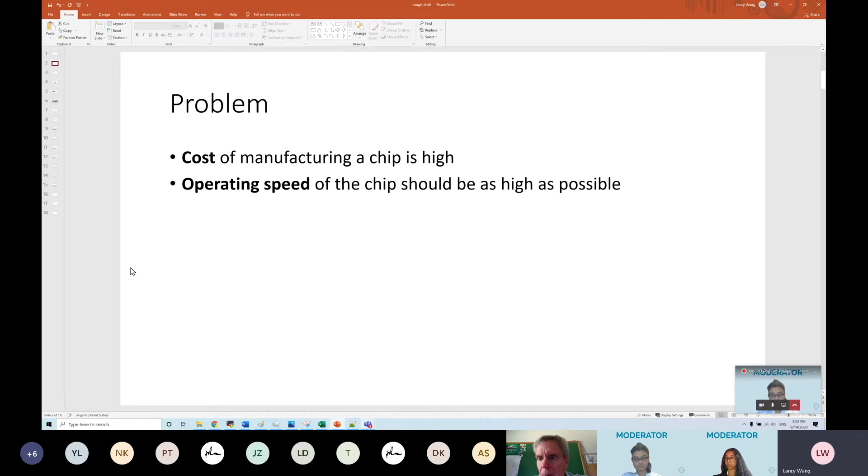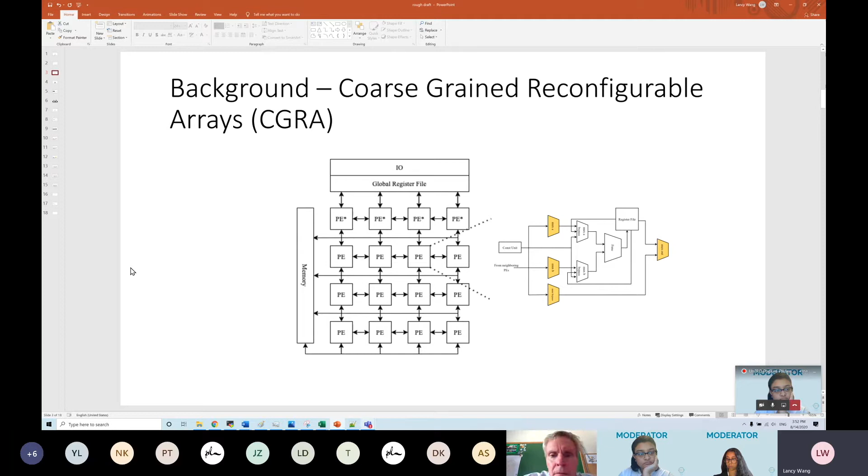The CGRA works by allowing the PEs in this diagram to talk to each other using interconnects, represented by the orange blobs on the right. And the goal of our research is to reduce the area cost of these interconnects. In a 2017 IEEE paper written by Stephen Chin, the interconnects in a CGRA can be shown to occupy over 20% of the overall chip area, making our attempts a meaningful effort at cost reduction.

So let me explain our goal using an analogy. Imagine a highway used to connect parts of a city. People get on the highway so they can reach their destination, where they can then work, eat, or do whatever else they need to carry about their day. Note that people don't actually want to spend that much time on a highway, and cities don't want to be congested by them. Now, the interconnects of a CGRA are like a highway.

Instead of transporting people, they transport signals so they can eventually reach their destination to do a computation. Like a highway, the interconnects don't actually allow signals to do useful work. However, they still take up space in the chip, and space is money. Now, you might be asking, since they're not doing any work, why not get rid of them? Well, it turns out that we can't, just like we can't yet with a highway. What we can do, however, is reduce their area cost as much as we can, and we do this through a method called double pumping.

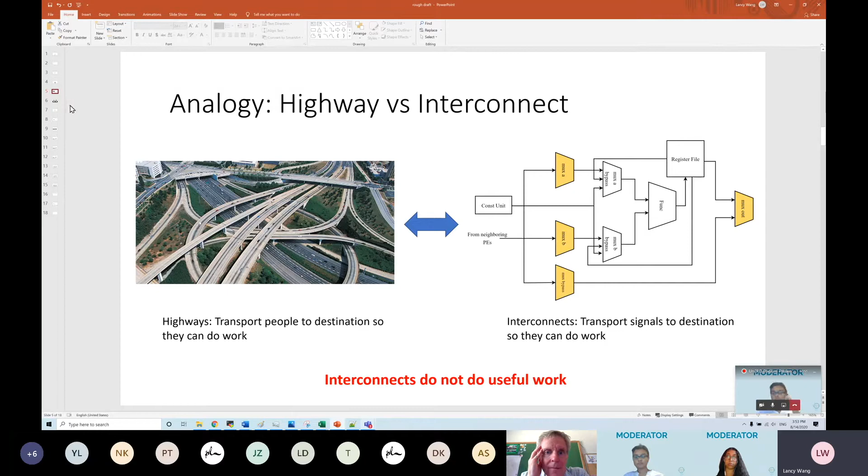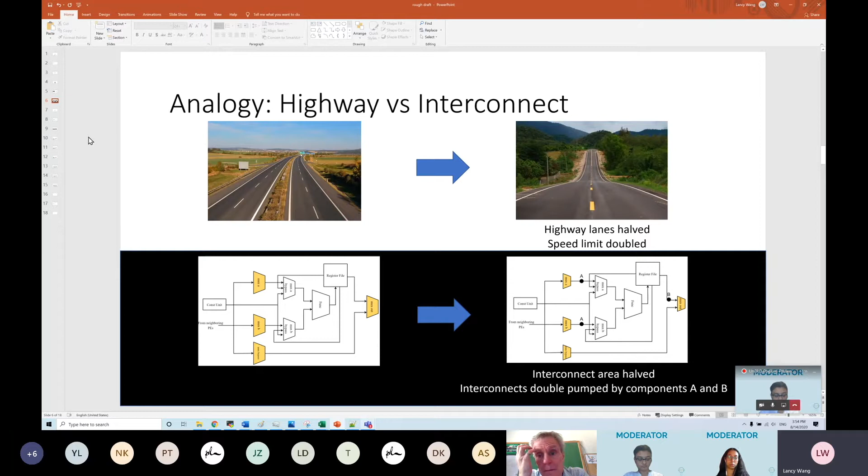Double pumping interconnect is like turning a 4-lane highway into a 2-lane one. In order to allow the same number of people to reach their destination in time, cars need to travel at double the speed. And so we allow the interconnect to pump signals at double the speed. In order to accomplish this, we add components to the CGRA and evaluate them across different designs. We came up with 3 designs for our double pumping solution, and each of them performed differently in terms of area and speed.

Our methodology leverages standard tools used in industry, and in essence, these steps are to model, simulate, compile, build, and trace. First, we need circuit models for our CGRA. Leveraging the CGRA-ME framework, we generate high-level architecture description files by telling the framework the type of computation we wish to perform and the type of architecture we wish to use. When we modify these files to incorporate double pumping, we now have a set of models to evaluate, the baseline versus our modified designs.

Before we move on with our models, we simulate our results using ModelSim, where we check the resulting waveforms to see if our results are sensible. If the waveforms are correct, we can move on to step 3, where we synthesize our model. Synthesizing a circuit from a model is like creating a scenery from Lego blocks. Our model is the scenery, and the standard cells are the Lego blocks we have to work with. Using Synopsys Design Compiler, we turn our hardware models into a standard cell netlist, showing exactly which cells will be used to build our circuit.

The standard cell netlists are then used by step 4, where we place our standard cells and wire it up using Cadence Innovus. Now we can see a chip forming, and we have our accurate circuit design. When we pass the final circuit information to Synopsys PrimeTime, we can trace the longest path in the circuit and find the maximum frequency at which it can operate.

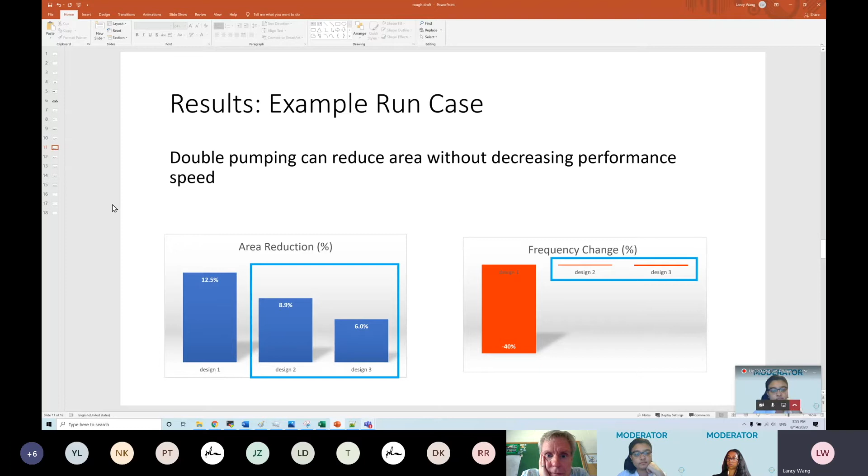Here I have the results from one particular run case to show you the potential benefits of double pumping. These graphs show the area and frequency costs of our design. In this example, 2 of our designs provide a reduction in area and negligible speed cost. One can also choose to take a performance hit for even greater area reduction.

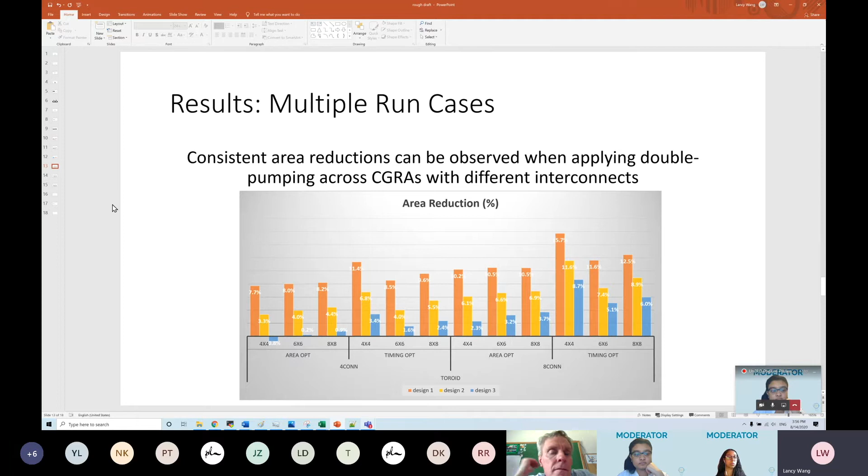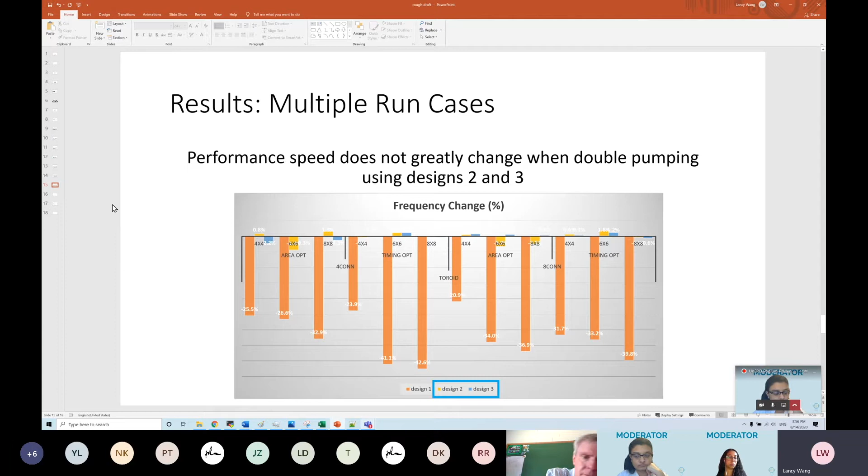To check the validity of our results, we collected area and timing numbers across a variety of CGRA interconnects, and you can see the consistent area reductions across all of them. Higher area reduction is observed in CGRAs with more interconnect richness. And performance speed does not greatly change when double pumping using designs 2 and 3, shown with the shorter bars in this diagram.

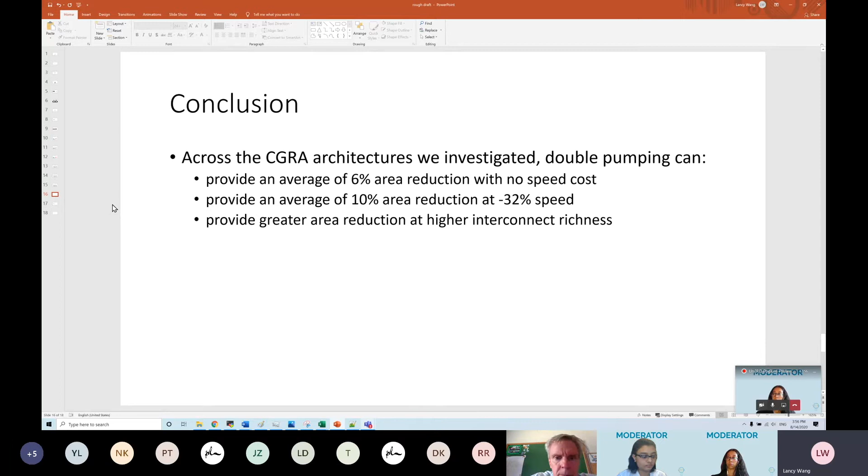In conclusion, across the CGRA architectures we evaluated, double pumping can provide an average of 6% area reduction with no speed cost, an average of 10% area reduction at minus 32% speed, and in general, it can provide greater area reduction at higher interconnect richness. For producers who use CGRA or who would like to apply our strategy in other contexts, it means their product can cost a bit less and run a little bit faster.

My team is currently in the process of evaluating double pumping designs across other CGRA architectures. And we are also working on a paper for the Design Automation and Test in Europe conference. Finally, future researchers can evaluate the performance of double pumping in other circuit designs, and chip designers continue in their endeavor to find cost-effective and fast-performing designs for the next generation.

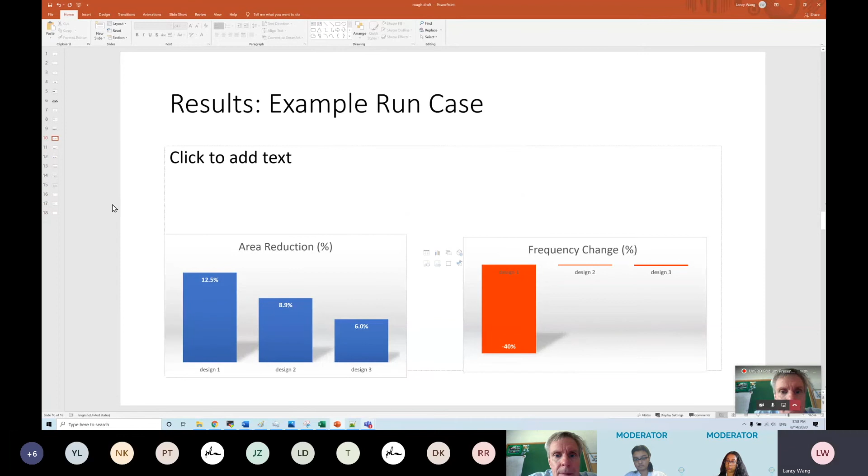I was mostly working with the other 4 parts of this project. The model was built by previous students working on the team, and my goal was to add the components that do the double pumping and simulate to see if the results work. So when we had issues with our timing, I would go and debug the ModelSim results. And I actually went to Synopsys Design Compiler to compile the circuit down into the circuit elements.

I went into Cadence Innovus to create the circuit and check the wiring and check the parasitic files. And I did the final path tracing to find the max delay in the circuit, the critical path delay, and to find the max frequency from that. But the circuit model was given to me, and I only had to modify it. Okay, thank you.

Thank you for the... My voice is echoing. Can you hear me well? Yes. Oh, I think you're muted. Hello, does anyone have any other questions? Did she get to ask her question? I think so. She got muted. Okay. Can you hear me now?

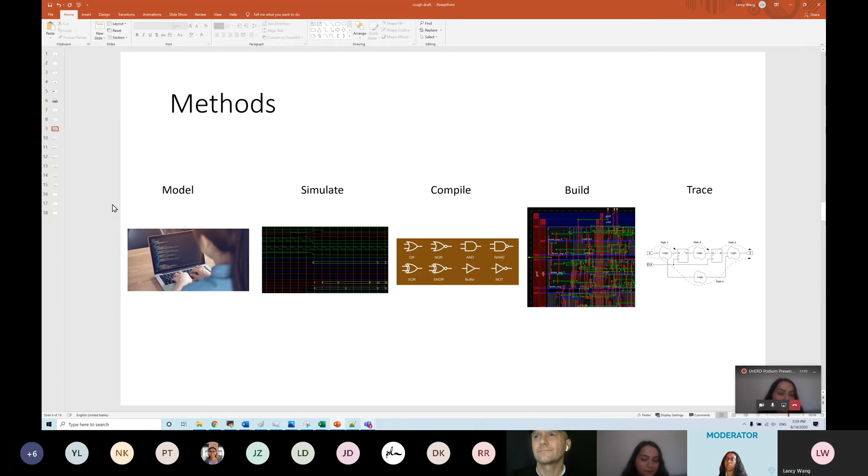Yes. Okay. So I just wanted to know the type of software that you use to do simulation. We use ModelSim, Altera ModelSim.

Excuse me? I think my connection is not good. Maybe type the answer in the chat. That might be helpful. You're muted, Maisha. Sorry. There's another question in the chat, which we have some time for you to answer.

So the question is, why does Design 2 afford a greater area reduction for lesser speed reductions compared to Design 3? What were the key differences between these two designs? What is the size operating speed difference between these CGRA and standard chips? So between Design 2 and 3, Design 3 was actually a standard design that we saw from a textbook, and we wanted to show in our paper that the most basic thing you would immediately go to would be Design 3. However, it would offer less area reduction than Design 2 did.